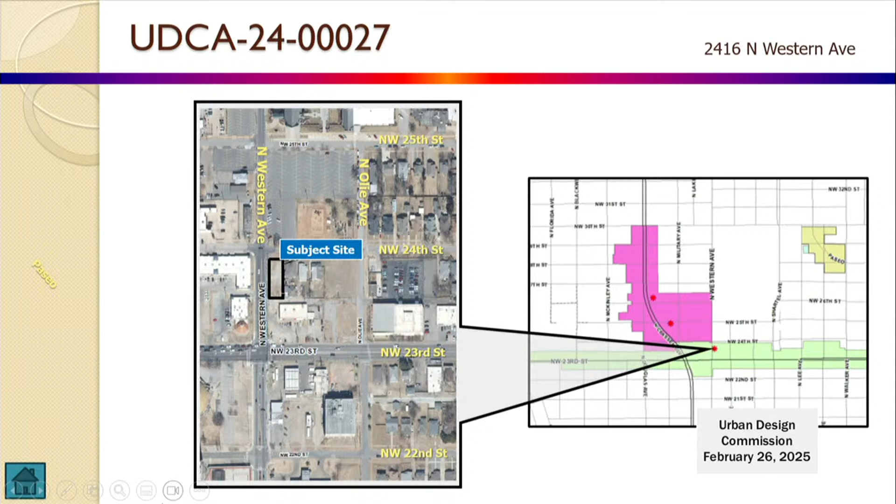If there are no questions for staff, is there an applicant or representative available? Yes, they're here. Daniel Douthit, Rollock Studio, on behalf of Milieu LLC, 1141 West Sheridan Avenue.

Do we have any of the renderings we could look at? Or maybe a floor plan? They're in the packets, so we don't have them for the screen. Oh, okay. Okay, it's up there now.

As you can tell from the floor plan, the building is primarily kitchen. This is a grab and go restaurant, so wall space is at a premium for racks, storage, power, and vent hoods. The owner believes in feng shui as an organizational principle for the building, so they don't want any openings on the west facade. The one we have put there was certainly a compromise they are not particularly happy with. The feng shui setup says fire goes here, water goes here, then there's a miscellaneous corner for everything else. I know it's odd, but that's where we are.

I think for the most part it's very clear where the entry is from the perspectives and renderings. I don't know how much more glass we could really add. I would also like to note the budget on this is incredibly modest. I think they will be hard pressed to reach it, so adding more glazing is probably not a good financial option for them if you want to see this project at all.

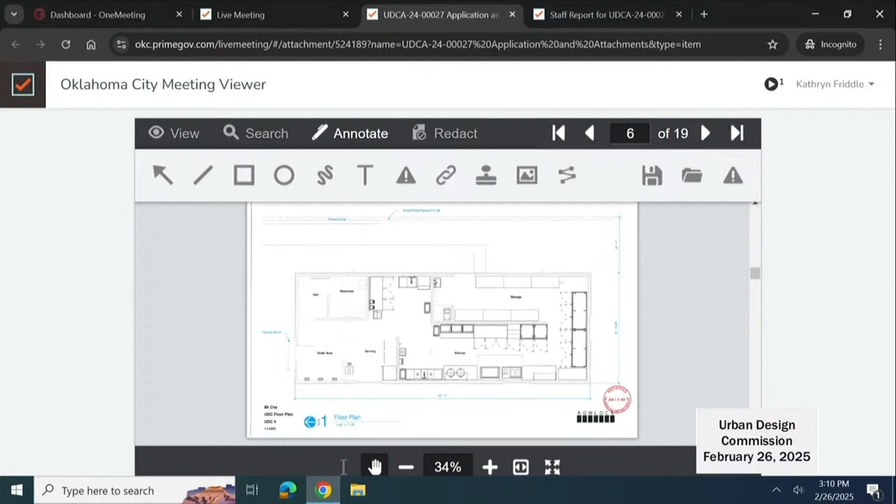Any questions for our applicant? I do have a couple of questions. I may have missed the business idea. It's a restaurant, correct? It's a grab and go. Oh, grab and go, yeah. There's no real seating. So is there—we didn't see any parking plan?

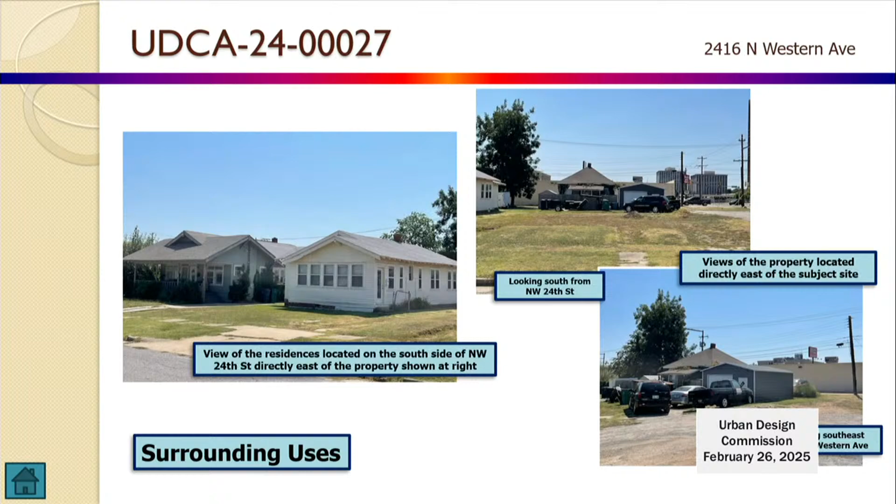There's no parking required by the SPUD or in the UDC. There's ample street parking throughout this area. There's also the giant church parking lot, which sits vacant 95% of the year. Might be worth having a conversation with them and seeing if we can lease a space or two.

And no drive-through, correct? No drive-through. Western is an arterial street, which means we are limited on curb cuts. We actually cannot have a curb cut off 24th. We would be too close. We'd have to get a variance. I think that would be a hard variance to sell.

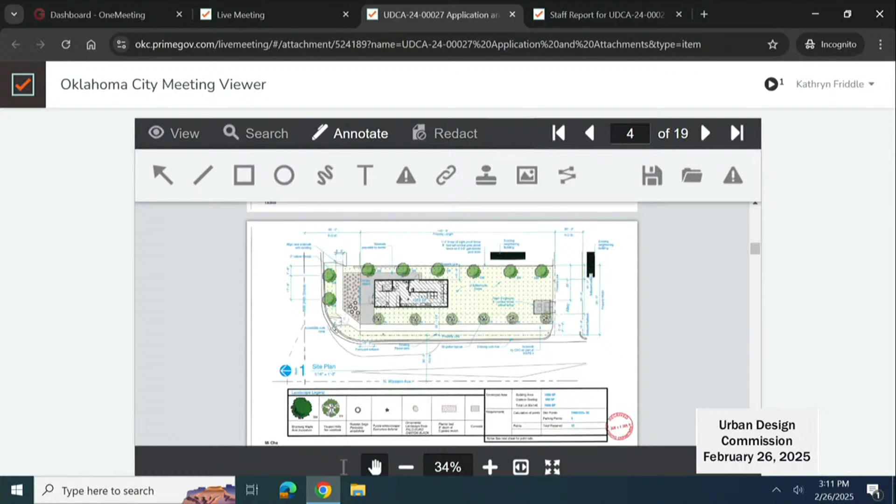I appreciate the feng shui comment, but from the standpoint of the exterior side, there is a missing component of what needs to happen with respect to the pedestrian and their experience of the building. I don't know that glass cost comes into our conversation, but I think something should be done to give some kind of pedestrian scale and articulation on that western facade. I don't know that it necessarily has to be glass, but right now it's a stark wall that would set a precedent different than what we would impose on other individuals.

I know that in the past it's been required to add glass that is false and have drywall on the inside. You've already expressed that glass in and of itself doesn't work from a cost standpoint, so that seems even worse because now you've got the entire condition of a glazed system and an exterior wall system—you're doubling up. But has there been any thought about what could be done to the exterior wall treatment for at least a portion of it, so it's not just a single window on a blank wall?

I'm feeling like that's something we're probably not going to be able to figure out here, and it would almost have to be a condition of the approval to be worked out with staff. Yeah, the owner's intent was a very simple design.

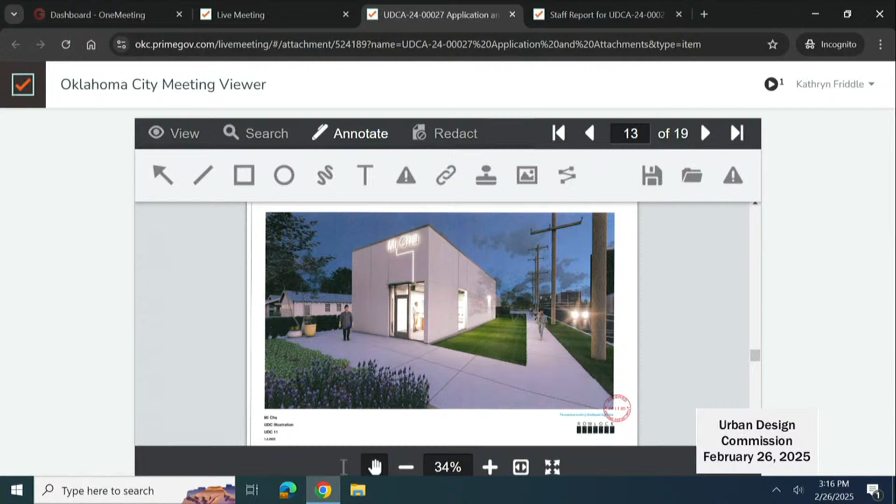Yeah, it's supposed to be simple and understated. That's the owner's intent, that's their wish. And because it is a guideline, no variances are required, and the commission has the latitude to either waive the guideline, vary it, or ignore it altogether without the need for a variance to be processed. So you do have the flexibility to allow it to be approved as is, but we thought there should be maybe one more attempt at trying to either incorporate some spandrel glass on this west elevation, or give a little bit more glass at the northwest corner of the building on the west facade.

There's quite a bit of landscaping on the north side of the building, pretty low profile, but are they even considering landscape as an option? There's a few trees, it looks like, that would be adjacent to the building. Is landscaping something they like, some type of screen or something, or would that mess up the design feng shui of that element?

A screen on the west side? Yeah, they've done a great job with the street trees. Just something, some sort of texture, because as of now it's also a solid singular color stucco wall. But I didn't know if landscaping was an option.

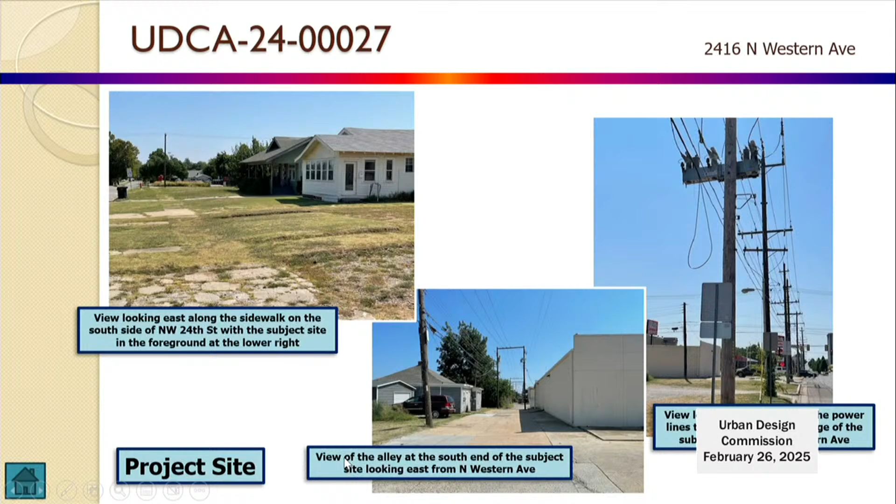So it's an interesting site. It certainly has some constraints.

I would like to note for years and years, a crummy little house sat in the back here that was a restaurant. It had no windows and a gravel parking lot, and I would not call it the best urban neighbor. I don't think the best urban neighbor is O'Reilly's just to the south either, with no windows and a sea of parking and no trees.

One other question, like the dumpsters, also on the south side of the site. Is there a plan to use the sidewalk to basically access that? It's going to open into the alley.

We've got one of the guy wires already relocated, so it'll work. From the inside, like literally taking out trash from the kitchen to the back, they'll have to go around the front of the building and then take it through the doors in the alley. They'll more than likely cut through the grass.

So, on one of these I'm looking at, it shows that you have hollies, landscaping. On one of these, it shows that there's landscaping all along this west side. Am I seeing that incorrectly?

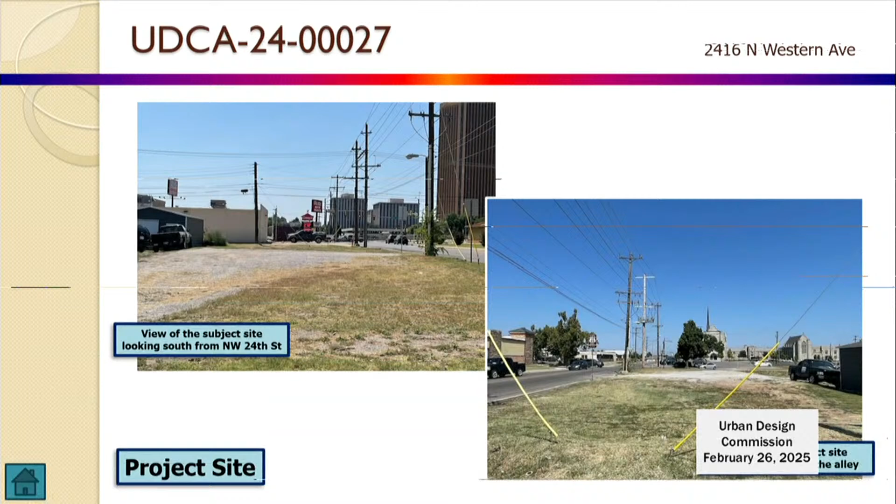I think your comments are correct. I think we just have to be really clear that we're not establishing precedent based on the fact that somebody asked for a blank wall or somebody asked for something that's a little bit in conflict with the guidelines. This is actually something in which that blank wall was intended to be there as a part of the overall vision - the subtle niche, the lighting, kind of this stark element.

I'm thinking about there are some AIA award-winning structures in this city that have no windows at all until you get to the inside of the building. So, if we're going to do this, and I hear what you're saying, and I kind of appreciate where the client has requested you take them, but it's really not precedent for the sake of the future individual coming and asking for a blank wall.

I was going to say that I actually do agree. I appreciate the consideration of scale and form in the context of the community that surrounds it. I think that's critically important, even more than architectural design. But architectural design, I feel, is sort of cutting edge and aligns with what's happening in that area. And I also appreciate the landscaping as a barrier to pedestrians along the blank wall.

I even thought maybe we could put a mural there, but that's not what they want. That's not part of the design, that's not part of the intent. And so I can appreciate that as well. I think I would have to go get a variance since we didn't actually include murals in the SPUD. They are a use group, believe it or not.

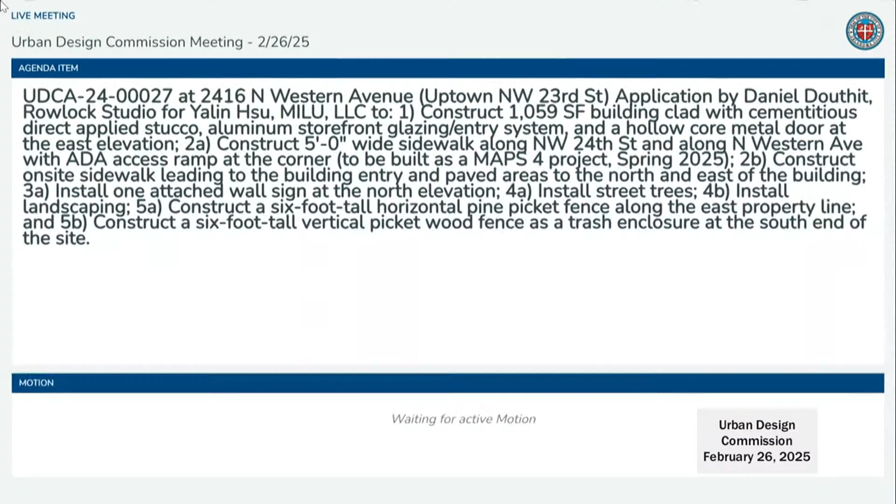Do you have any other comments or a motion? I'll make a motion to approve the application on the basis that the project meets the regulations and guidelines of the Urban Design Overlay District zoning ordinance as referenced in sections C and D of the staff report. I'd like to second. Yes. All right, thank you.

All right, it's passed. Moving on to the next item, we have UDCA-24-00038 at 2328 Northwest 23rd Street.

Thank you, Mr. Chairman. This application is a project to construct an addition to an existing auto repair business at 2328 Northwest 23rd Street. It's at the western end of the Northwest 23rd Uptown corridor, directly across the street from Shepherd Center, formerly known as Shepherd Mall. With this particular project, we've been working with the applicant for an extended period of time to try and resolve a number of issues that we've identified with this project. The first one was pretty easy to deal with because...

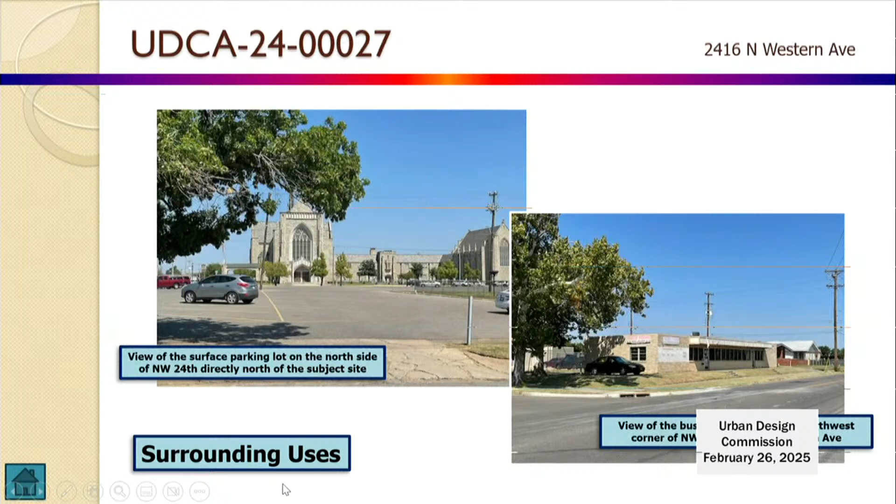The third issue is a guideline, the same one we talked about with the last case: the orientation of the building and the pedestrian comfort, safety, and interest, having the building oriented to the street. So the addition is kind of off the table because it's way at the back of the site on the south end. I do have a portion of the existing structure that... sorry, how did I get back on this?

We did talk about the possibility of doing some revisions to this front portion of the building to meet the regulations. However, due to the nature of the business and the fact that it doesn't really rely much on foot traffic from the sidewalk, since it's auto repair, and due to the fact that through our working with the applicant on this case, we've resolved a number of things detrimental to the pedestrian orientation.

That includes, among other things, the addition of a 10-foot wide landscape parkway at the front of the site that would be heavily landscaped with not only street trees but also shrubbery to help shield the view of the parked cars in the parking lot at the front of the site.

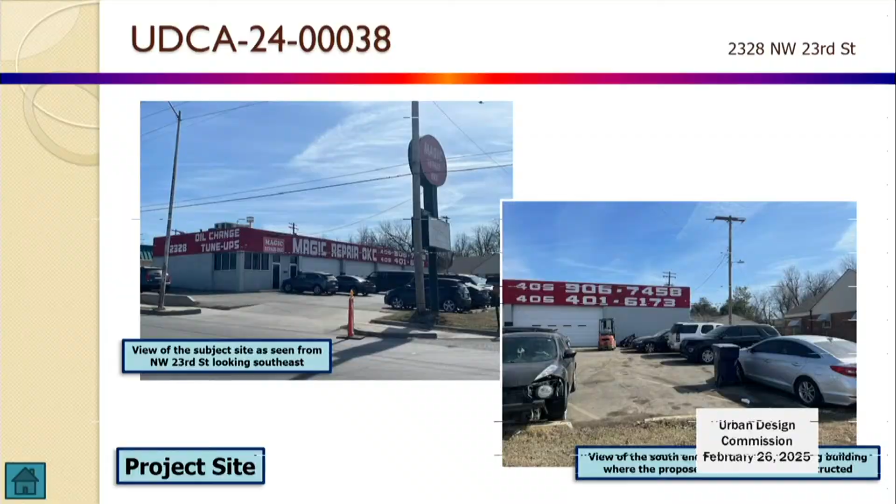This is a split-face block building that we're proposing to the south end of this site.

As Mr. Philbrick explained, we have agreed to do a lot of landscaping, a buffer between 23rd Street and the site, as well as the east side of the site, which is on Cross. In addition, we'll add some parking spaces and some sidewalks. We will close one entrance off of 23rd, and we will still keep the one off of Cross onto the site.

Any questions for the applicant? Assume there's no one present to, okay, I guess.

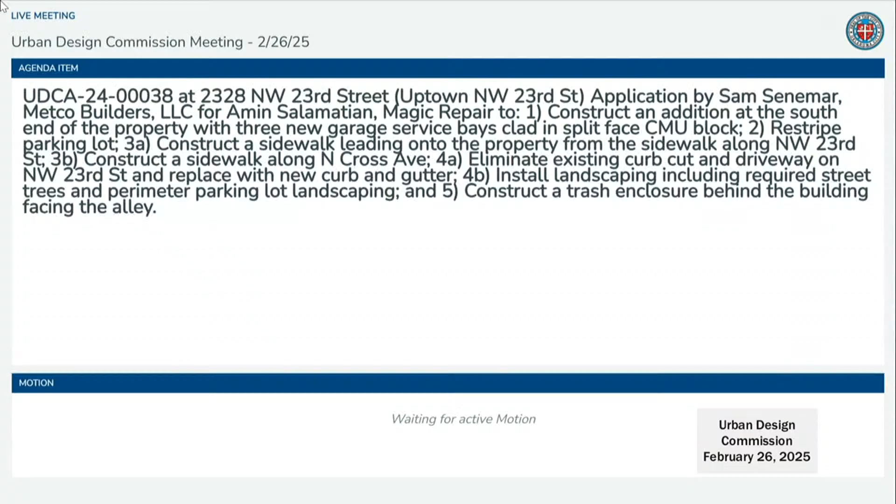Discussion. Can I make a motion? Okay, I'll make a motion to approve the application on the basis that the project meets the regulations and guidelines of the Urban Design Overlay District zoning ordinance as referenced in section C and D of the staff report.

All right, it has been approved. Thank you much.

All right, going into other business. I guess we're going to look at SPUD-1683 at 1229 Northwest 26th Street.

Yes, thank you, Mr. Chairman. This item is a SPUD proposal for the project site on the east side of North Classen Boulevard between Northwest 26th and Northwest 27th.

The site, on the northern half, is occupied by the Chinatown grocery and restaurant that is there, as well as a parking lot that abuts Northwest 27th. It was cleared probably about 4, maybe 5 years ago. There used to be a camera shop there and a few other commercial businesses. Further east along Northwest 26th Street, there was a 2-story residential apartment building that was also approved for demolition a while back.

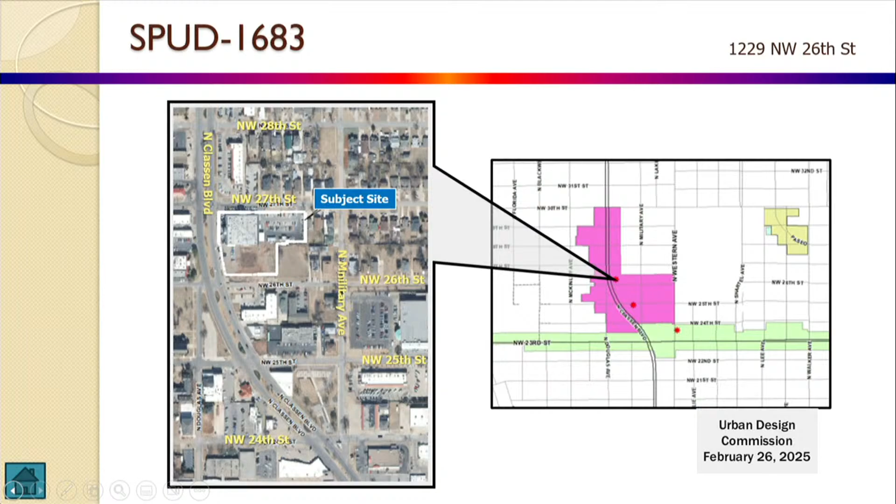That was a perfect summation. I got brought into this project after about two different design concepts, but I was part of that original SPUD, and yes, we had a totally different building in mind. But this grocery store is bursting at the seams. We need more room. I think a grocery store suits this area very well. It's functioned very well, and the Golden Phoenix restaurant has also expanded into that space. So that's what this whole project is in reaction to.

It is semantics, seemingly, that brought us all to amend this. We thought about amending, but it was beyond what they could do. So here we are—let's get the SPUD to match the new project. And yeah, we'll be back to do a full presentation on the design and all of the concerns of the Urban Design Commission staff at that time. So we're just thrilled that the SPUD is being recommended for approval to the City Council, and I'm happy to answer any questions.

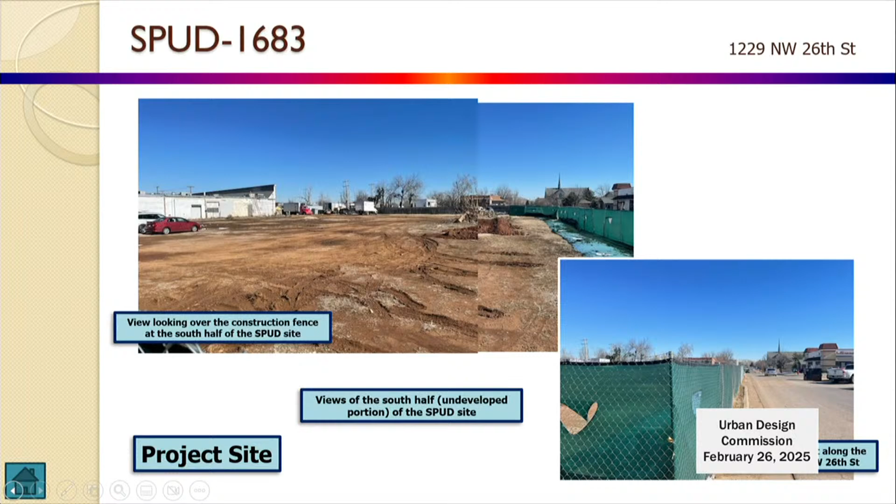I'll recommend approval of the application to the Planning Commission for a request to rezone from SPUD 913 to Simplified Planned Unit Development, SPUD 1683, that will develop in accordance with the NB Neighborhood Business District and the UD Urban Design Overlay District. I'd like to second. Thank you, Commissioners. Yes. All right, it has been approved.